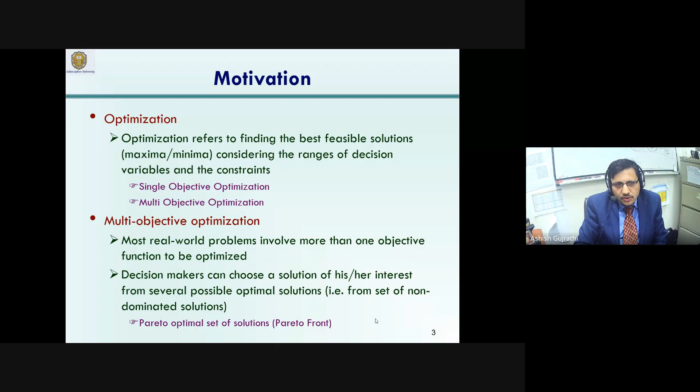So in multi-objective optimization, the decision makers are always interested in getting the Pareto optimal solution, which is also called the set of equally good solutions.

When we compare the stochastic or evolutionary population-based search algorithms, they are far different than the classical or deterministic algorithms. The classical algorithm starts with a single solution and ultimately results in a single solution. They often limit themselves towards reaching the non-optimum solution, because their background remains in starting with a single point, and they follow the fixed transition rule, like the Newton-Raphson method.

In the Newton-Raphson method, we know that the next point is always the current point plus some kind of addition, some formula like xi+1 equals xi minus f(xi) over f'(xi) - the function value at xi over the derivative of that function at the current point. So this differential is going to be added. That means from one point to another, to the next, the transition is going to be fixed.

There is no differentiation. In stochastic algorithms, we go for randomness, and because of the randomness, there is a better chance that the optimum point can be easily approached. So in multi-objective optimization, we often deal with two types of search spaces: the decision search space and the objective space.

So in that case, we are going to get another search space. So dealing with two types of search space is the key for multi-objective optimization, the reason why they are said to be more complex. Whenever we deal with solving such kind of problem, from the search point of view, they are referred to be more complex. And the more the complexity of the search space, the more challenging it is going to get the results. And the more the challenge, the more it is going to be realistic solutions.

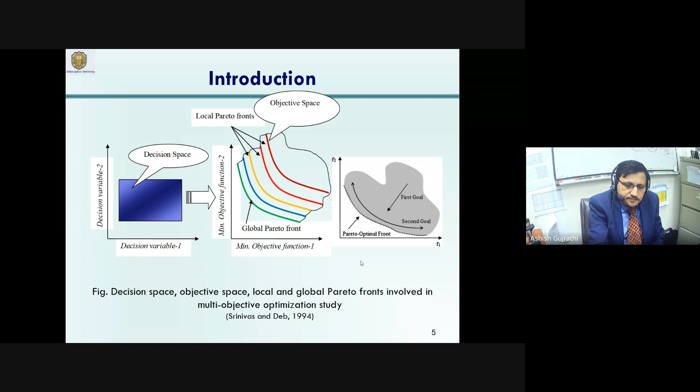So we can divide the multi-objective optimization broadly into mathematics, medicine, science, and engineering. In engineering, we can divide into chemical, oil and gas sector, where we talk about gas operations like gas sweetening, gas dehydration, and oil-based operations like hydrocracking, hydrotreating. Number of operations are there in the refinery. Refinery is full of problems, if you understand. Right from naphtha cracking, hydrocracking, hydrotreating.

The fluid bed catalytic cracking, vis breaking - each of these processes is highly complex, dealing with hundreds of reactions happening simultaneously, and to model such kind of problems, we cannot say that it's going to be a straight aspect. So often it takes efforts, and the challenges are quite wide when you talk about oil and gas based aspects.

The chemical engineering problems like H2SO4, vinyl acetate - there are a number of chemical processes that we deal with. Those are also the processes where multiple objectives like process, energy, safety based aspects can be focused. Pharmaceutical industries, which also comes under the chemical sector, and minerals processing - like iron production from the ores, or aluminum production, or any kind of cobalt, or any kind of metal or non-metal production. That will involve dealing with solids, and to model such kind of process, it will need extra knowledge of dealing with solids.

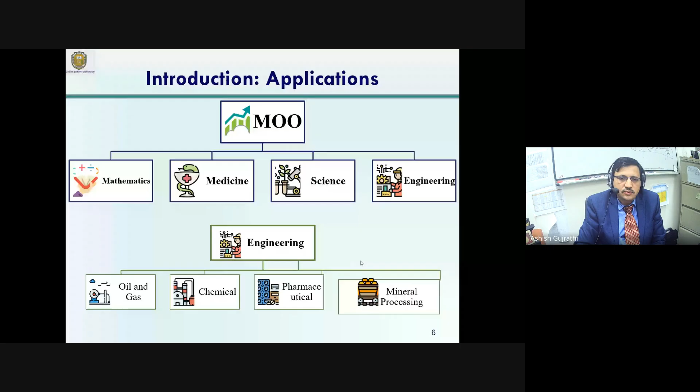Particularly, our group have successfully solved hundreds of problems to me. I can say that these topics, though they look to be bulleted, belong to the PhD titles of some of the students, and often MSc work from the students, or from the industrial projects that we solve. Each of these problems has taken not less than one year to solve and to get published.

So styrene manufacturing process, right from adiabatic and pseudo-isothermal operation, then low density polyethylene reactor, which comes under the polymer sectors, PTA oxidation process - another very complex process, polyethylene terephthalate wiped film reactor, where we deal with multiple phases like polymers, gases, and the polymers are also the dead polymer and the live polymer. Nylon 6 polymer manufacturing process, solar desalination with phase change material.

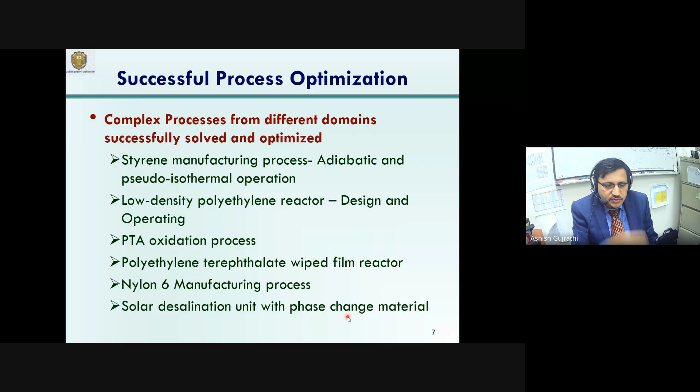So in this case, wax is used as phase change material. Right from solid to liquid phase, its heat transferability will keep on changing, so that aspect has to be considered in the desalination process. Pyrolysis of jatropha residue, de-oiled cake, supply chain planning, waste office papers for cellulose production, extractive desulfurization of liquid fuels, naphtha cracking, ethane cracking, large-scale ammonia production with water electrolysis.

When we say large scale, that means we are talking about industrial scale. The idea of adding the title 'large scale' is to relate the work to industrial processes.

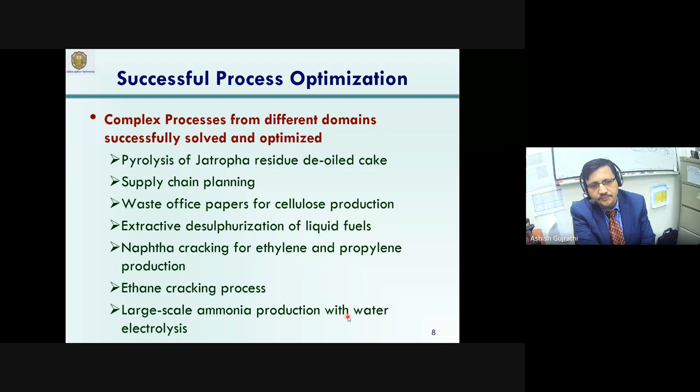Examples include lysine fed batch fermenter in the biochemical sector, cell recycle based continuous lactic acid production, occupational health and safety for process industry, green ammonia production, large scale methanol production, and water flooding in oil fields.

Water flooding in oil fields refers to the oil and water present in the earth, in the porous part of the rocks. Such oil wells are often spread over kilometers, and the depth is also often several kilometers. So we get the geoseismic data, and from there we start our study.

The approach deals with training the model using real-time data from years, which we consider, and then driving the optimization from this subspace. Otherwise, it is extremely difficult to deal with water flooding based problems.

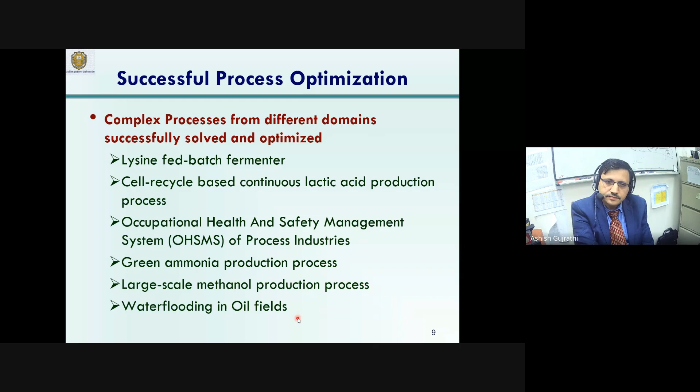Acid gas sweetening is a sector we have been working in a lot for almost a decade. Still the work is going on, and the title is so wide that it will never end. That kind of opportunities we are able to see.

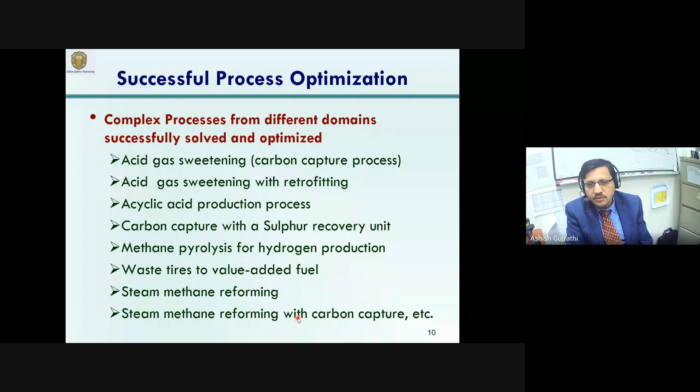Other areas include acid gas sweetening with retrofitting, acrylic acid production, carbon capture with sulfur recovery unit, methane pyrolysis for hydrogen production, waste tires for value-added fuel, steam methane reforming and its optimization, and steam reforming simultaneously with carbon capture, etc.

Out of so many problems that we have attempted and successfully solved, in today's lecture I will talk about the biochemical process, where I will discuss lactic acid production process, oil and gas, where we'll talk about the carbon capture process, and the green ammonia production process from the chemical sector.

So the first title is cell recycle based continuous lactic acid production process.

If I see the mathematical model or the schematic, we can see that there are two reactors here, reactor 1 and reactor 2, and the cells, in this case the viable cells, are recycled. They are separated and recycled back to the reactor. This is how the industry is working in the real world: the cells are separated from the substrates and from the products, and they are recycled back.

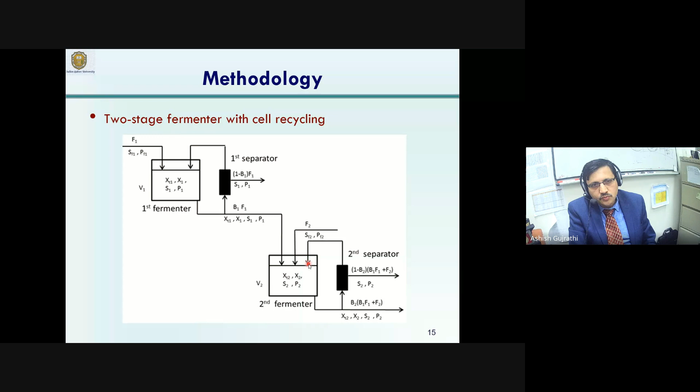The viability of cells has to be checked, whether the cells are dead or not, because we cannot deal with high temperature or high pressure in biochemical processes. These cells are basically live proteins, so dealing with live proteins in chemical processes is not that easy. The way we deal with a catalyst, though dealing with a catalyst is not simple either, dealing with proteins or cells is more difficult than dealing with a catalyst.

A number of equations have been used. These are the four differential equations used to model the two stage biochemical production process: four equations for the first reactor, and similarly another four equations for the second reactor.

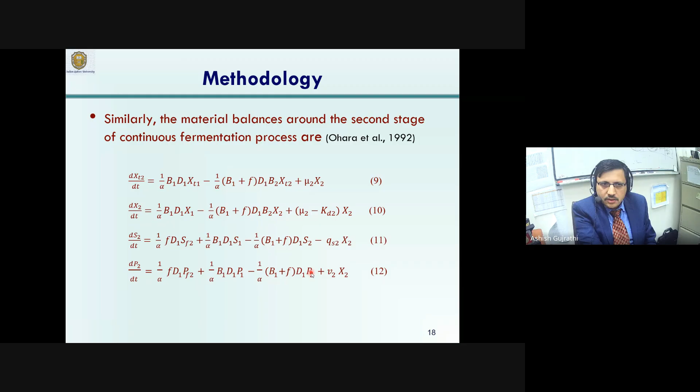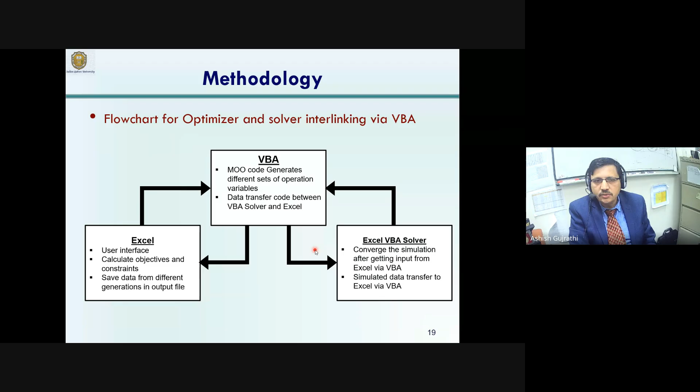A number of variables are listed here, and we made an effort to collect the independent variables. Accordingly, the equations are solved using Visual Basic, using Excel with macros formed by the VBA solver. This has been linked with another Visual Basic code in Excel macros, and Excel was used for data transfer in this process — so Excel linked to the macros of the optimizer and the macros of the solver, interlinked together to get the results we are going to discuss.

In this case, the first job was to tune the model. The very first task goes into tuning the model, done for different types of kinetic parameters.

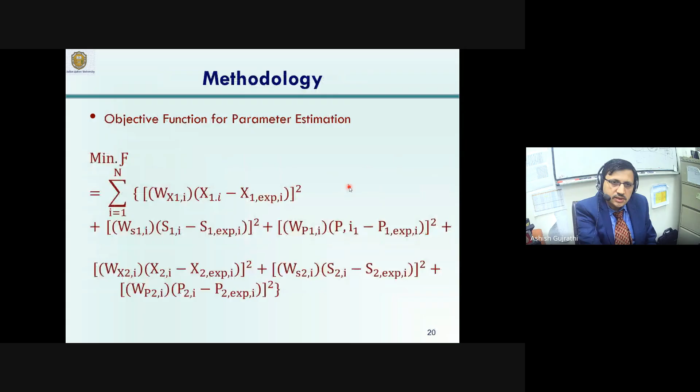Kinetic parameters like the specific kinetic constant for growth, for production, for dissociation — a number of kinetic parameters. These kinetic parameters come through the model itself. If you see the model, they are present in equations like Kp and Kd naught. So all those parameters are constants.

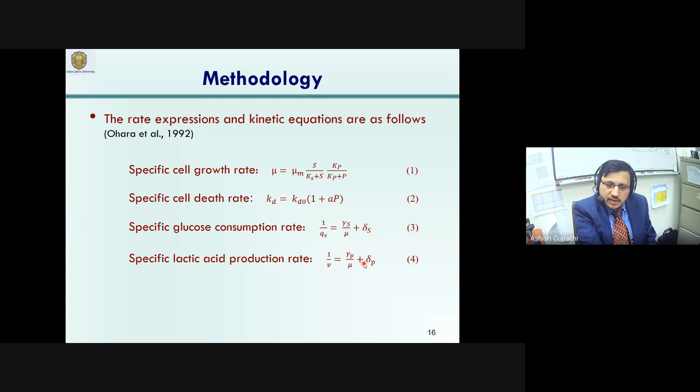In the parameter estimation, we have targeted the variables which are kinetic in nature — that means the ones which are usually obtained using experiments.

If you consider the efforts put in the past with the experimental approach to obtain those kinetic parameters, first of all, it is almost impossible, or very difficult, to obtain the values of 9 or 10 kinetic constants through the experimental approach. Through the experimental approach, we can deal with 1, 2, or maximum 3 kinetic constants in general, but dealing with 9, 10, 12, or more than 7 or 8 variables is almost impossible. It takes huge cost, huge effort, and the uncertainty range varies a lot, given the budget available to researchers.

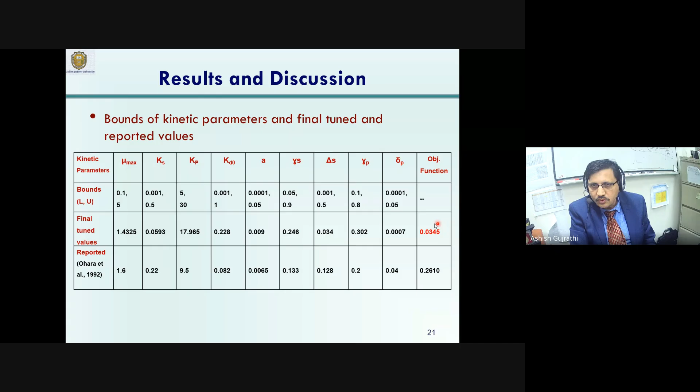So finally, tuned values are there, and we can see that we got the objective function value. We got 0.03 compared to 0.26.

Now, once the model was formulated, we went into optimizing the process from the multi-objective perspective. Towards this, productivity, substrate conversion, and yield - three different objectives - have been optimized simultaneously.

Productivity was formulated from the equations itself, in terms of kg per hour flow rate. Conversion is also formulated from the substrate. The idea here is that, as we can see in the model, a lot of substrate in the experimental process was still present - almost 2.5 kg per meter cube of substrate - and the model was tuned with the experimental data.

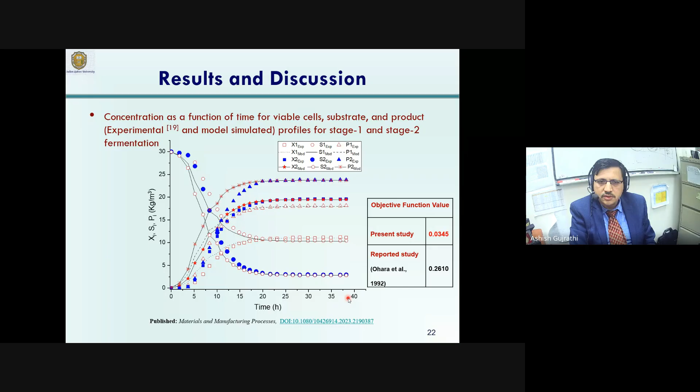So we saw that there exists a good scope in reducing the substrate. There is no fun in keeping the substrate till the end, because if it's present, we also have to deal with separating that substrate from the product. So why don't we look for converting the substrate to zero range? That means zero raw material at the end of the process, but also you end up dealing with the cost of separation that is usually spent in the industry.

Number of variables are used. What are those variables? These are the dilution rates, bleeding ratio, and some of the constants in the equations which have a direct impact on the model. SF1 and SF2 are the substrate feed rates to the reactors.

Productivities of the reactor - because these are not very high pressure, a constraint has been put on productivity and on the conversions, and the range of S2 should not go beyond 0, because ultimately we are dealing with mathematical equations. It is difficult to control mathematical solutions - they may go into negative solutions, which may make our model unstable. So if you add constraints such that if it goes less than 0 we terminate the process, we can multiply the chances of getting results. So constraints are added not just from the process point of view, but also considering the success rate you can get in getting results.

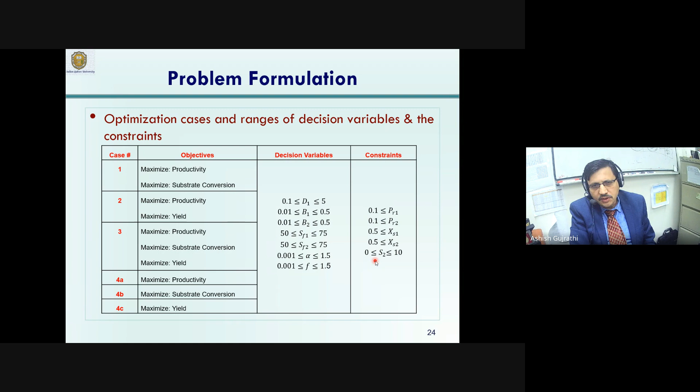Often many researchers deal with solving such kinds of problems and end up getting no results. So if they can focus on why they are not getting results, then issues can be resolved.

This particular process was solved on a very high-speed workstation with 128 GB RAM, and the NSGA2 algorithm was used, which is a very popular algorithm proposed by Professor Deb and his researchers.

For the lactic acid productivity and substrate conversion, a beautiful disconnected Pareto front can be seen. When I say beautiful disconnected Pareto front, I mean it is extremely difficult to reach where our group has reached, and the disconnected Pareto front indicates that the process is highly unstable, highly complex, and highly nonlinear in nature. This non-linearity and complexity leads to getting this.

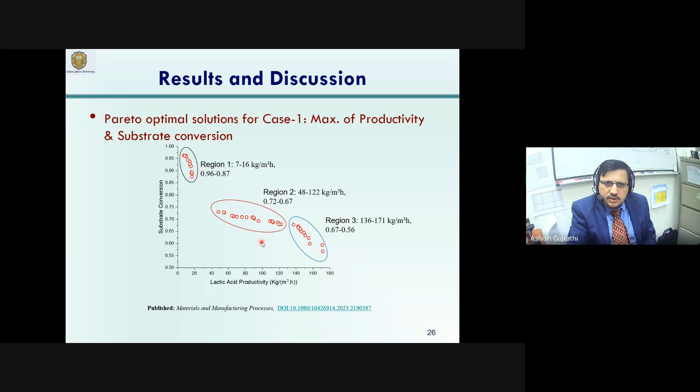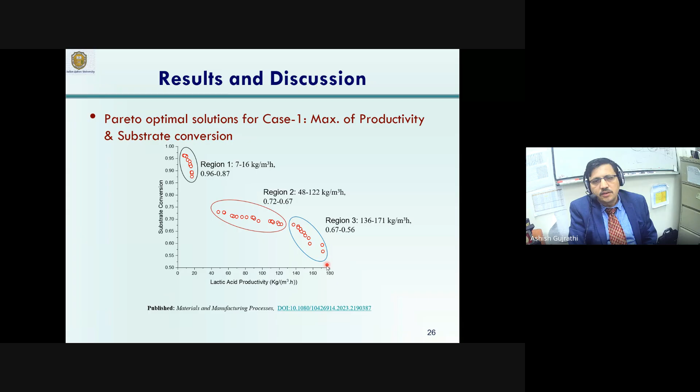Now we need to see why we are getting a disconnected Pareto front, and we discuss that usually in the results. So, from an understanding perspective, we can divide this Pareto front into three regimes: 7 to 16 kg per meter cube productivity, 48 to 122 kg per meter cube, and the third region is from 136 to 170-180 kg per meter cube range.

Now, if you see the variables, what we got on the Pareto front is because of the changes in variables which have affected the search space, the objective space. So, the dilution rate versus lactic acid productivity, and the dilution rate versus the substrate conversion.

If the dilution rate is low, the substrate conversion is high, but the productivity is low. I mean, we are talking about the case where the substrate has got consumed, but no significant product has formed. That means such kinds of solutions are not going to be useful.

In multi-objective optimization, to achieve one objective, the second objective has to be sacrificed. So if you want to achieve 100% substrate conversion, then productivity is sacrificed. This is also the reason why in the experimental domain, the substrate was kept unconverted.

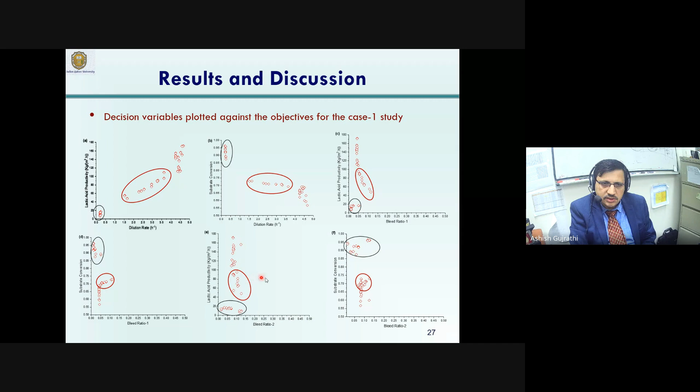Similarly, bleed ratio 1 and bleed ratio 2, with respect to the objectives, have got direct impact on the objectives. Other variables like feed glucose concentration, and the flow ratios F1/F2 and F2/F1, for both objectives also have significant impact on the results, which has been widely discussed in our article.

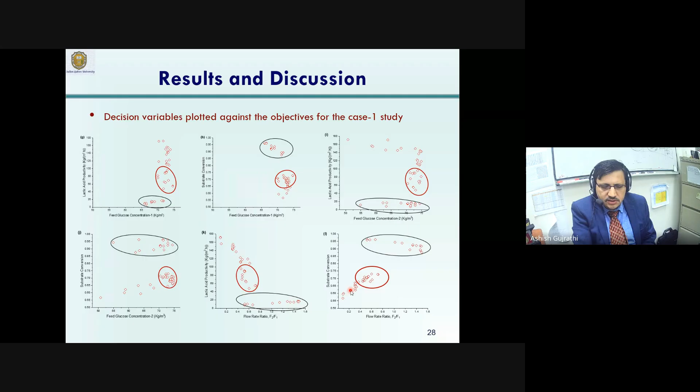The second case is where yield and productivity are simultaneously maximized. Three objectives are simultaneously maximized for the same process, and as we say, the more the number of objectives, the more complex it becomes. We can see the 3D solutions where the best optimal solution is also identified using the Pareto ranking methods.

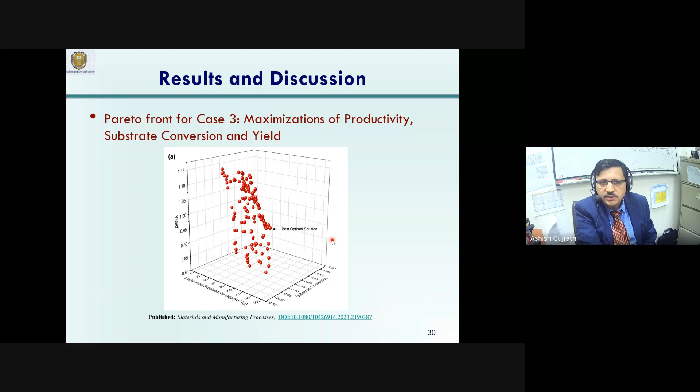Now if you compare case 1, case 2, and case 3 of the results, we can see that when we change the approach from single objective optimization to two objective, to three objective, and beyond, then solving from single objective optimization, we land up with a single solution.

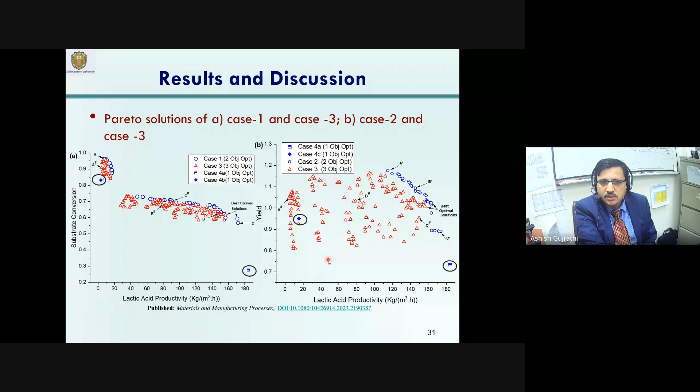The results are compared with the variables to understand why it is happening. We can see that the case with single objective optimization resulted in maximum productivity, and the reason has been explored in the results analysis.

If maximum productivity is obtained in case 4, that is single objective optimization, why has it happened? So if you go into the variables and compare them with the variables obtained where such high productivity was not obtained, like the very low productivity in case 1, we can see why and how things are changing.

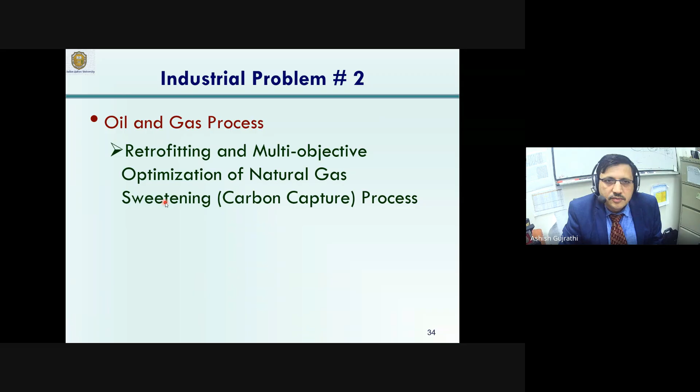Now, a second, more complex and more realistic problem from industry is the carbon capture process. Before we go into carbon capture, we should understand why we capture carbon from the natural gas.

Because the CO2 that is present becomes corrosive, and it comes up with problems of freezing of the gases and erosion of the pipeline. So it becomes very important that we remove elements like H2S and CO2 from the natural gas, and this purification process is called the gas sweetening process.

It's a traditional process - there is nothing new in this process, where amines are used to separate CO2 and H2S from the natural gas, and we deal with huge amounts of flows here.

In terms of standard meter cube, it becomes almost 60,000-70,000 meter cube, which is very high. In kg per hour, it becomes almost more than 1 lakh kilogram per hour of flow rate. So with such a quantum of flow, to remove the CO2 and H2S efficiently, it is very important that the process is run with an optimum approach.

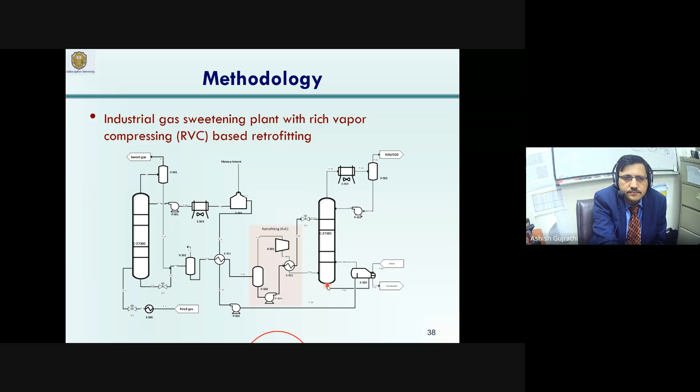So this is the retrofitting unit, and what we did here is we built the model using the Promax software, and it involved interlinking with Excel and with the optimizer, which is written in Visual Basic. So in this case also we made use of Excel's capability to solve such kind of problems, and these problems are that complex that it takes on average 20 to 30 days to get the results that we are going to discuss today.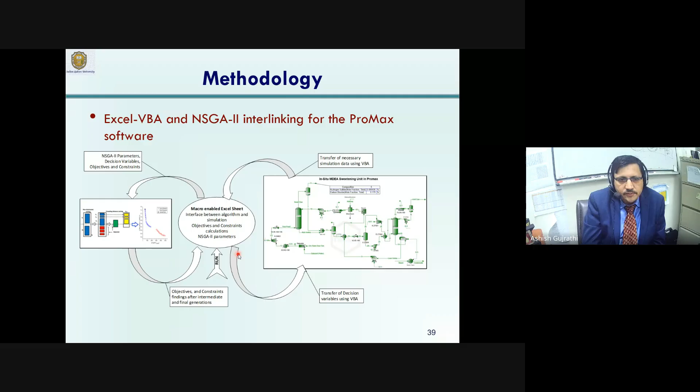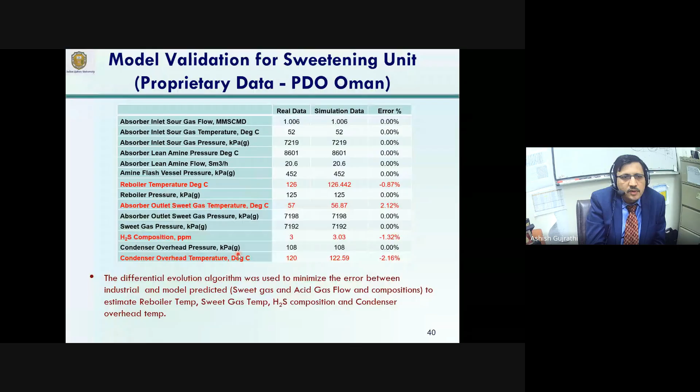The work that I'll be presenting here is already accepted in the Energy Journal. The reviews are completed, and it is accepted in the Energy Journal. The model is validated with acceptable accuracy, as you can see.

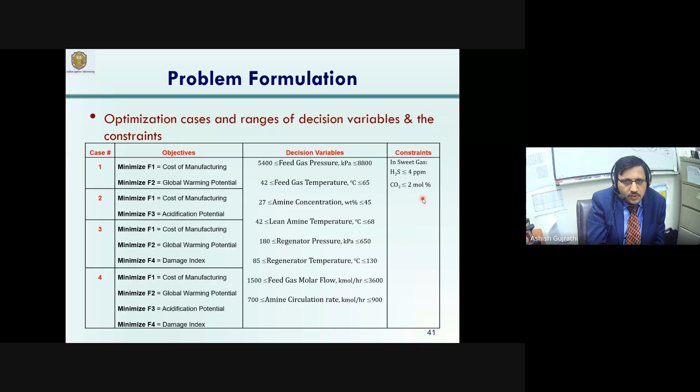But as we know, it is permitted that CO2 can go up to 2%, 2 mole percent in the sweet gas. So there is no point in reducing CO2 to 0 value, and this is where the oil and gas industry, traditionally, they are making this mistake. So this range of solutions, where we say we got equally good solutions, is possible, though the range is not that wide. Allowing the CO2 emission up to 2%, this range of solutions is possible.

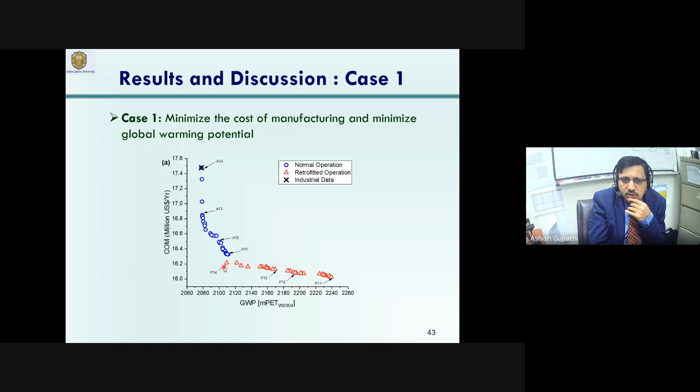And the retrofitted solution, retrofitted design, indeed results in reducing the cost of manufacturing, though it involves fixed capital investment.

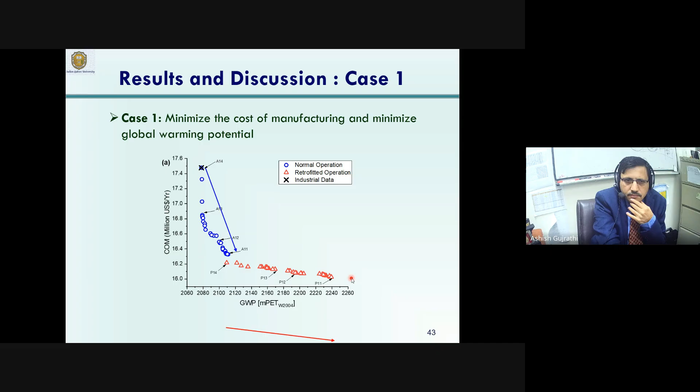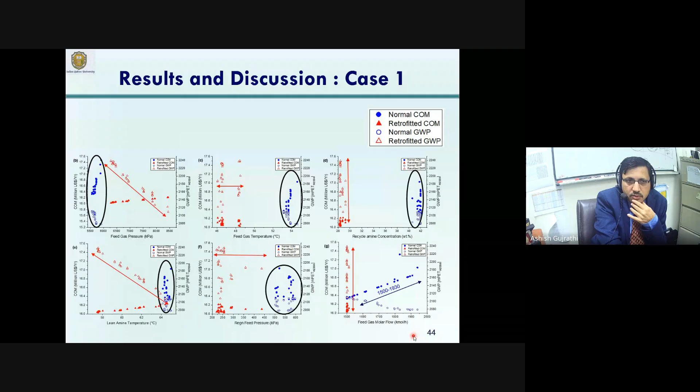So again, it's how things are changing with feed gas pressure, with feed gas temperature, with recycle amine concentration, how the COM and the GWP are getting changed. Similarly, lean amine temperature, regeneration feed pressure, feed molar flow - as you can see, very high molar flow, 1500 kilomole per hour, which is very high - and its impact on optimization is shown through the results here.

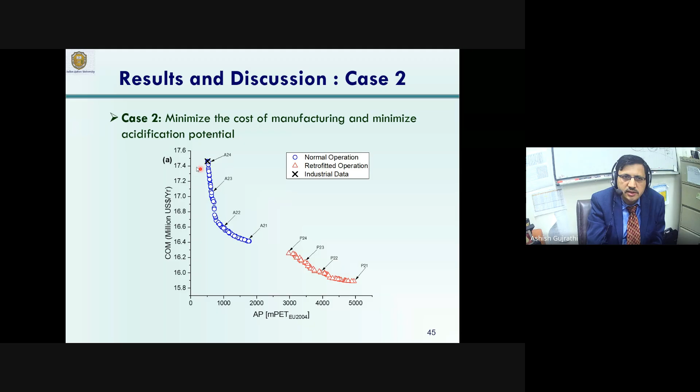The second case, a beautiful Pareto front, where the normal operation and the retrofitted operations are shown. Different points are selected in this case, and they are compared among the normal operation and the retrofitted operation, and also with the industrial data. And it is shown in the tables which we are going to discuss.

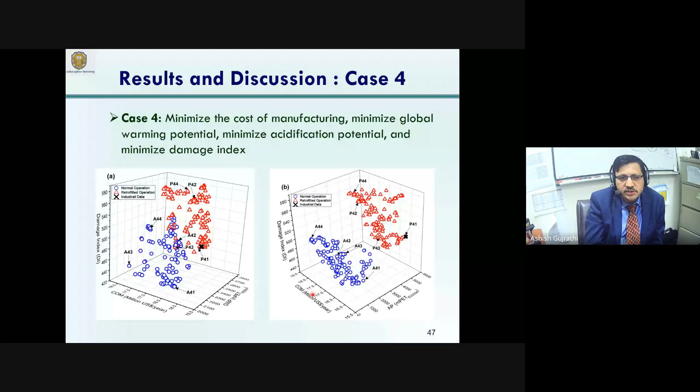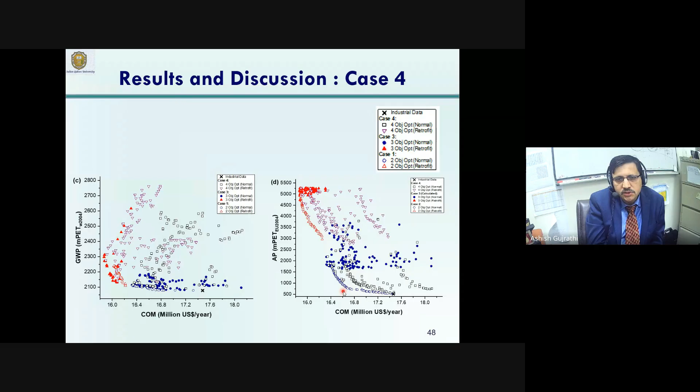The comparison between 2-objective, 3-objective, and 4-objective optimization for a real world problem is shown, and we can see beautiful disconnected Pareto front solutions. Imaginary Pareto fronts can be seen. So this is the local Pareto front, where, as I move my cursor, these are the local solutions. So though in 3-objective and 4-objective they are scattered solutions, they ultimately end up with local Pareto fronts. And because of the presence of more conflicting solutions, their solutions are compromised, or we can say their solutions are non-dominated compared to the 2-objective optimization results.

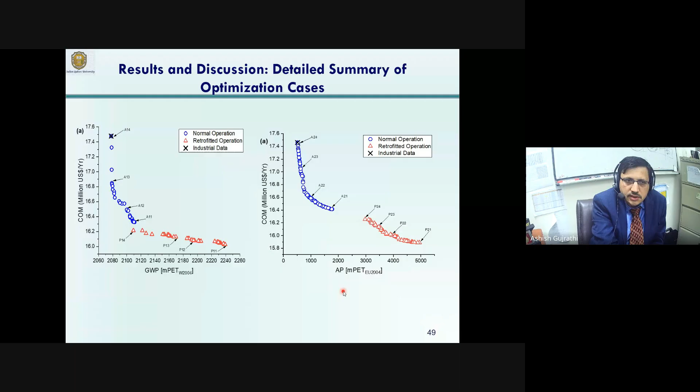For the selected solutions, for the normal operation and for the retrofitted operation - for the normal operation here, and similar results for the retrofitted operations are shown for the selected points. So we can see that an approach is followed here to discuss the results, which makes the publication possible in a high impact journal.

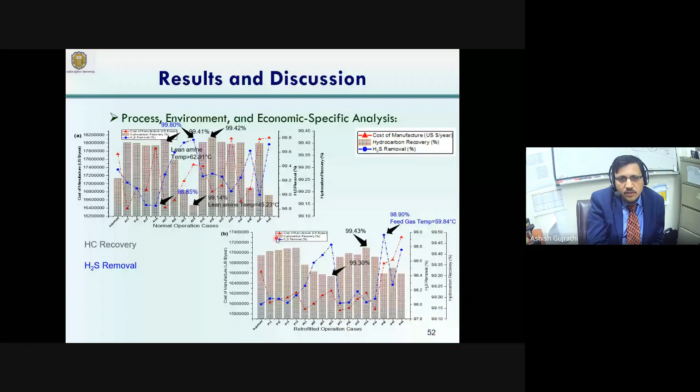And we are dealing with thousands of gallons of oil per hour, so that shows the importance of solving such processes.

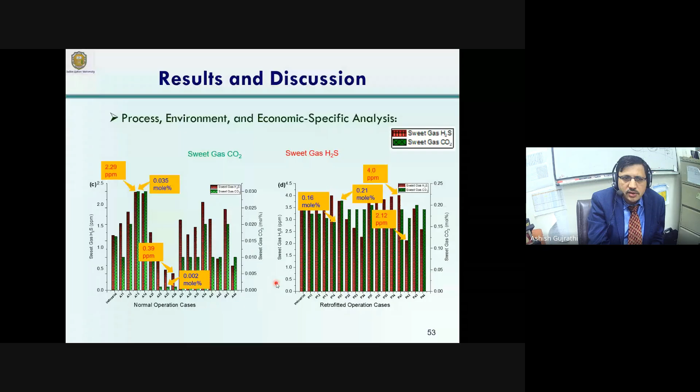Another viewpoint is looking into the sweet gas, H2S, and CO2 for the selected points, and detailed analysis has been reported in our study. I will be sharing our articles with the organizers, and they will be sharing the articles with you.

This is shown for the normal operation and for the retrofitted operation.

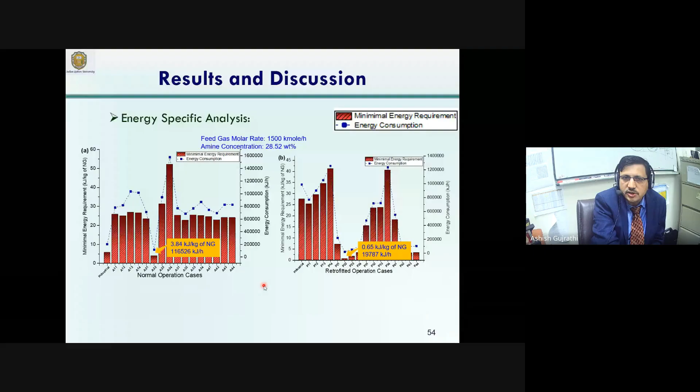The thing we can see here is that there is a distribution. Neither are all of them high, nor are all the selected solutions low, nor are all the solutions unique. There is a difference, and this difference is considered significant when we talk about the process operation, which shows the importance of such a study - getting the distributed solution.

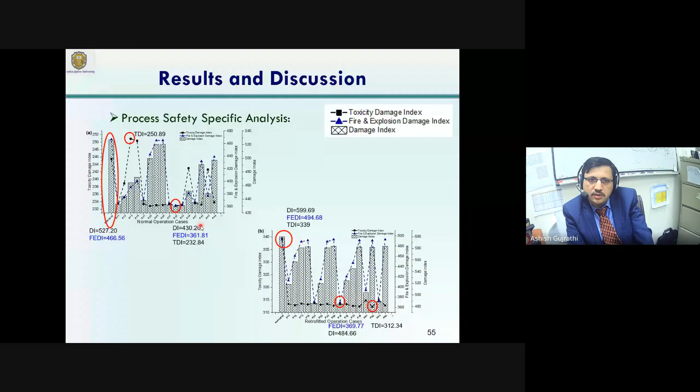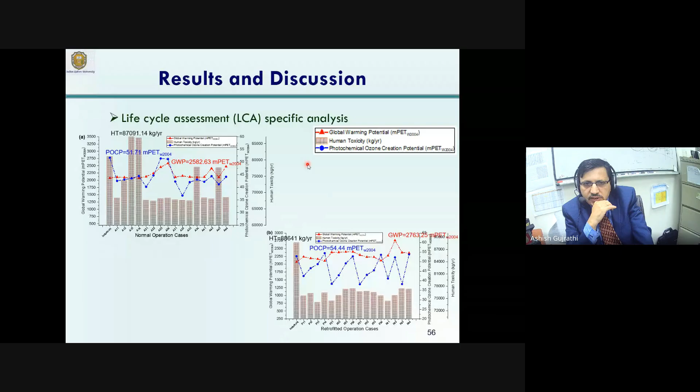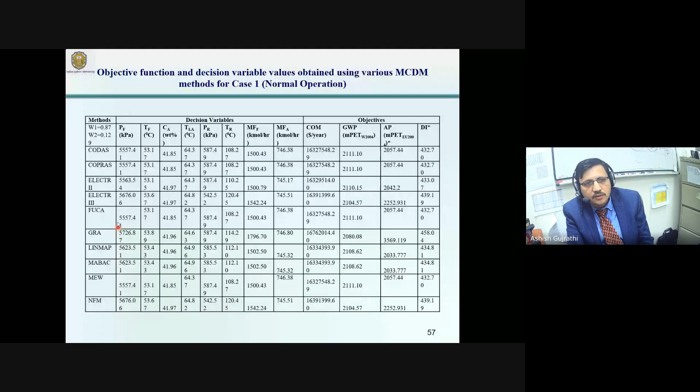So detailed analysis - we made use of 10 different Pareto ranking methods here, like CODAS, COPRAS, ELECTRE II, ELECTRE III, FUCA, GRA, LinMap, MABAC, MEW, and NFM, for the normal operation, and again 10 different methods for the retrofitted operation.

These solutions are ranked for each case, for the normal operation and for the retrofitted operation, and compared using NFM, one of the methods. This method is used to rank and show the top 5%, top 10%, and top 25%.

So what are those objectives? They are related to sustainability. When we talk about minimizing CO2 emissions, minimizing energy, we talk about green processes.

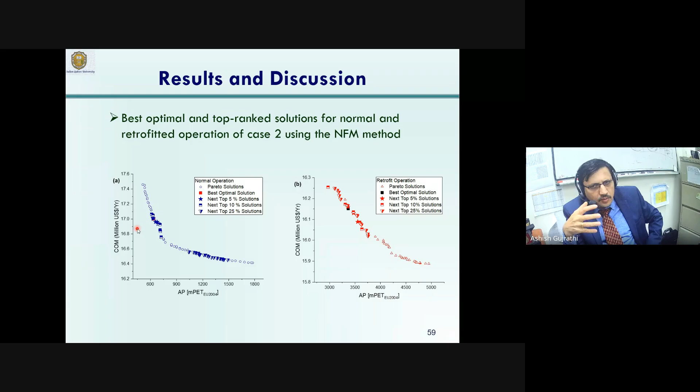When we talk about enhancing the cost, minimizing the cost, enhancing productivity by utilizing resources, that talks about sustainability. And when we talk about dealing with production, emissions, and safety together, we treat it as a sustainable and green approach.

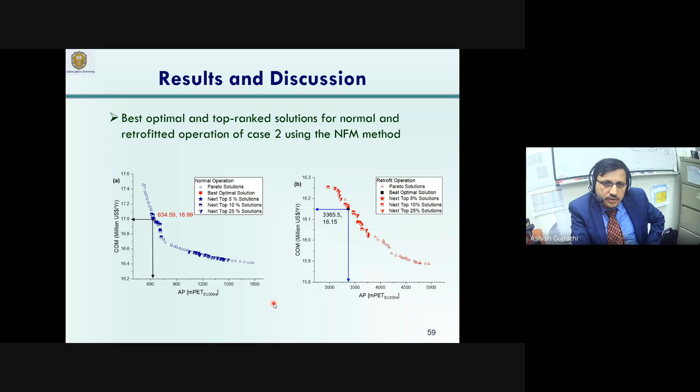Between the normal operation and the retrofitted operation, we can see a significant decrease in the cost of manufacturing: 17 and 16.2 million US dollars per year. There are also significant changes in the AP values, acidification potential values, almost 3365 mPET European Union 2004 versus 634 AP values. So significant changes are present, showing the impact of retrofitted based optimizers.

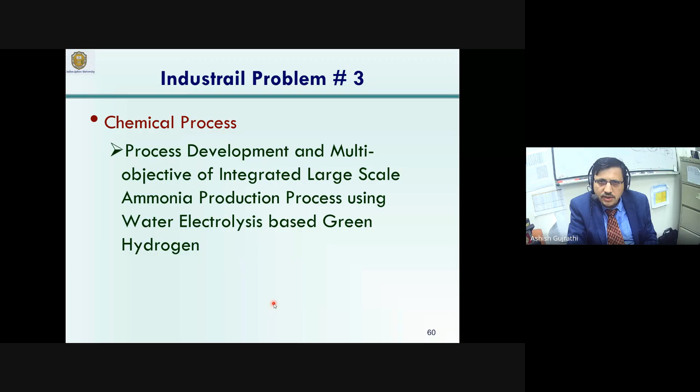The third process, I think I'm in time - we'll finish by 7:15. The third process is on green ammonia, large-scale green ammonia production using water electrolysis-based green hydrogen.

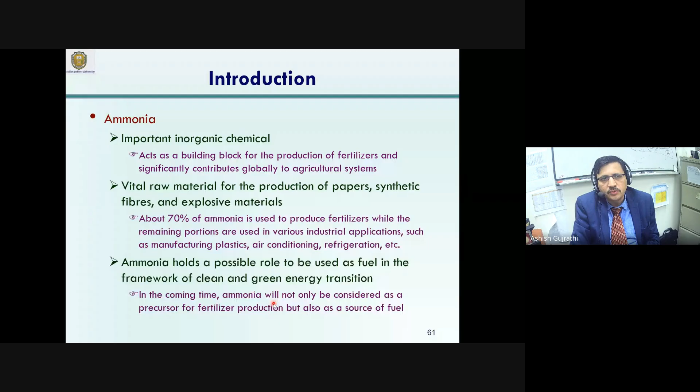Ammonia, as we know, is considered one of the important products, not just as a cryogenic fluid, but also as one of the chemicals where hydrogen can be stored. It is possible that ammonia is considered a product because ammonia has lower specific volume compared to hydrogen, so it is easy to store ammonia and then convert hydrogen from the ammonia.

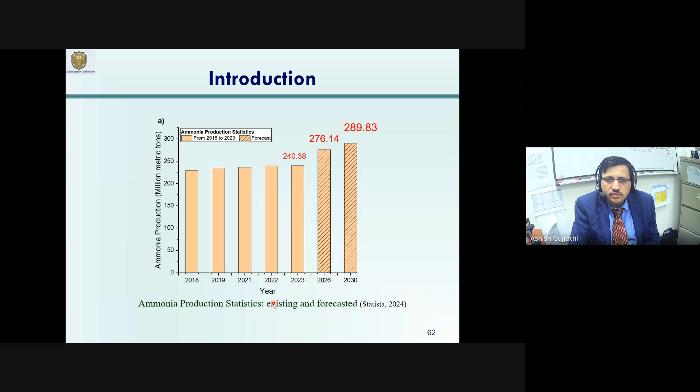The ammonia production rates are shown here, but considering the increase in hydrogen demand, this statistic is going to increase significantly. Among the different regions, the maximum comes from East Asia, which includes China and India, and North America almost 12%, Latin America 4%, and Europe 12%. So the major production is from Asia and America.

Now there will be a growing demand, as we said just now. While meeting the demand, attention should be given to lowering the energy consumption and reducing the emissions. Currently, ammonia production consumes around 2% of total final energy and contributes 1.3% of CO2 emissions from the energy system. It's a huge contribution, we can say.

2% from the final energy, so we can say that it's significant energy involved in the production of ammonia. If we can focus the objective like energy, we are directly contributing towards sustainable and green approaches. The biggest contributor to energy consumption of the ammonia industry is natural gas at 70%, followed by coal, electricity at 3%, and oil at 1%.

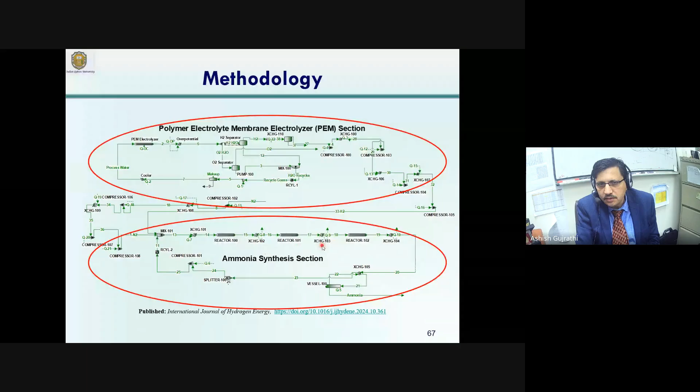Hydrogen, along with air and nitrogen, is used to get NH3 in three connected reactors.

In this case, we maximize the production rate, we minimize the production cost, and we minimize the total energy, subjected to more than 7 or 8 variables. That means we are talking about a multi-dimensional subspace.

Just to show you here, when I say two-objective optimization, I deal with x1 and x2 variables. So one point here will give me one x1 value and one x2 value.

But when I bring another variable here, like temperature as x1 and pressure as x2, temperature and pressure, two objectives, that means a two-dimensional subspace. But when I bring a third variable, temperature, pressure, and concentration...

So one point on the subspace will give me what? One value of temperature, one value of pressure, and one value of concentration.

When I bring a four-dimensional subspace, one point in the subspace will give me one value, then second, then third. Because this is the operating point in a given subspace, one point will have that many axes.

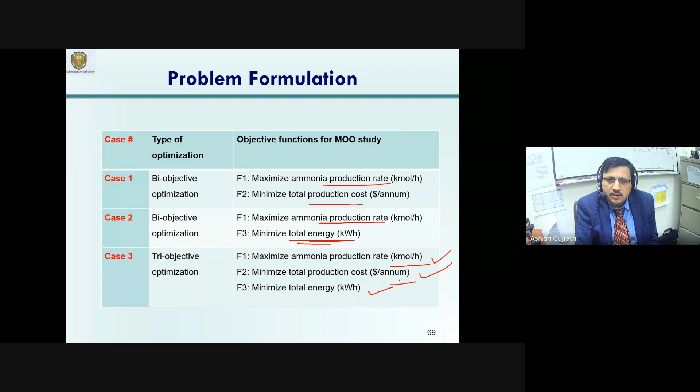This work was published in the International Journal of Hydrogen Energy recently. Green hydrogen and ammonia - green hydrogen because we get the hydrogen using the water electrolysis process. The ammonia is produced and then optimized simultaneously using multiple criteria, including ammonia production rate, total production cost, and energy.

We made use of Pareto ranking, MOO special solutions, global warming potential and CO2 emissions, energy, and heat credits based analysis. So statistical analysis of different factors is conducted.

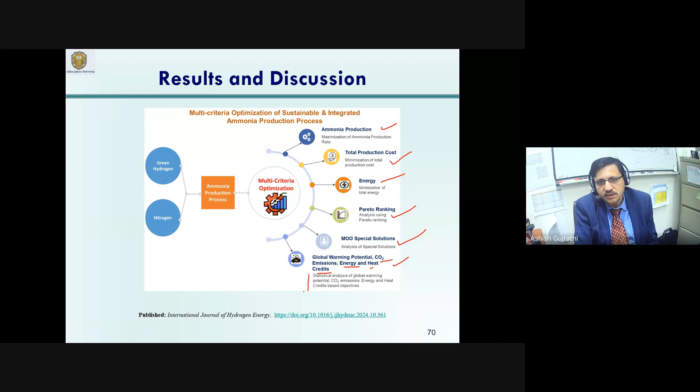Because ammonia, if you look into the Haber-Bosch reaction for ammonia production, it's a reversible exothermic reaction. So lower temperature and higher pressures are favored for such a reversible exothermic reaction, as per Le Chatelier's principle.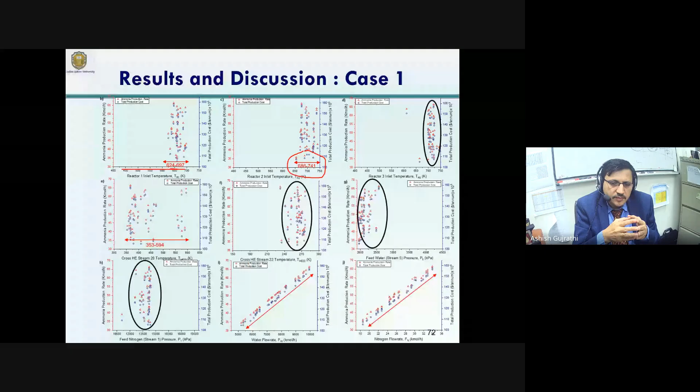All those aspects—the ability of solutions, the nature of the process involving reaction kinetics and their rules—as we know, single reactions are different from multiple reactions. Reversibility is another aspect, isn't it? Endothermic reactions, exothermic reactions, simultaneous reactions happening together, and the thermodynamic aspects.

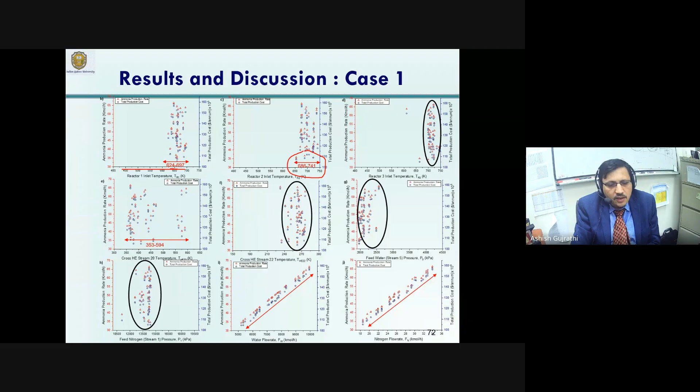So if you consider process optimization as a bundle of all these aspects, it leads to a highly complex domain. By considering objectives like total energy and production, we are taking this title towards sustainable and green chemical technology. In this talk, I have selected a product considered as a storage carrier for hydrogen in the coming time, where sustainable approaches like energy and production rate are simultaneously targeted.

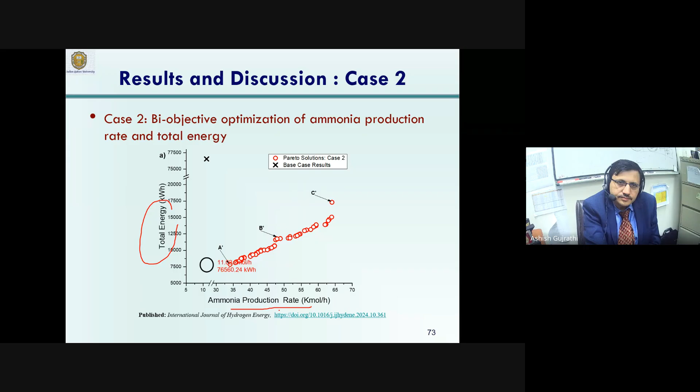The three objectives together towards sustainability.

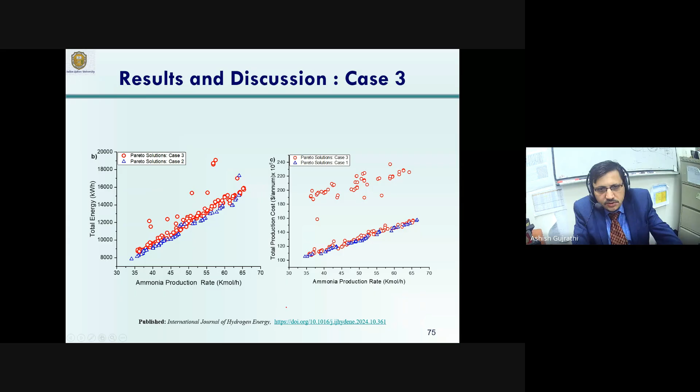I can show you this article. The title itself is 'sustainable'—so if you see the title here, we are able to bring process development and sustainability and green chemistry together, isn't it? So the talk I'm giving is highly specific to green and sustainable technology.

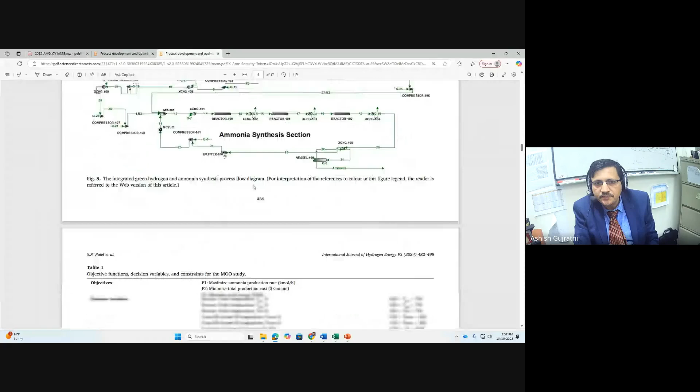What I'm presenting here is all reported in what I'm discussing in these slides—the process model which I have shown in two sections, the chart which I have already discussed with you, and the figures which I'm going to discuss now with you.

The major impact I'm going to show here is on how the solutions are obtained. The time is too small—we cannot go into that depth. But as I told you, I'll be sharing these articles with the organizers, and they can share them with you. They are quite interesting to read.

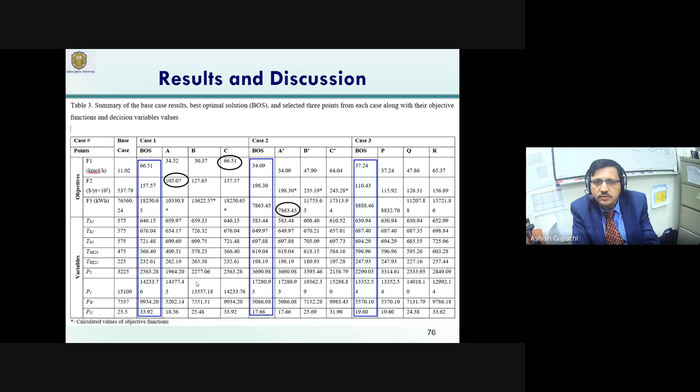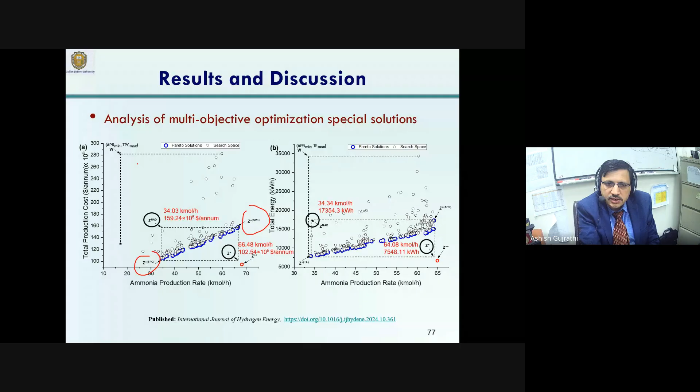For this real world process, we were able to report mathematical aspects like nadir solution, utopian solutions, and ideal solutions, and that has been published in the International Journal of Hydrogen Energy. The Pareto ranking is again applied here.

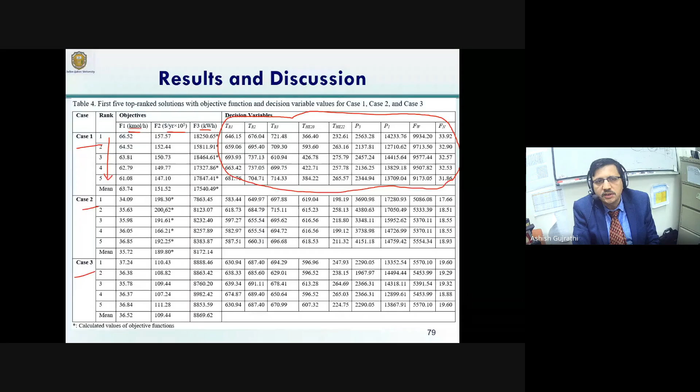The top 5 rank solutions are shown for different cases: case 1, case 2, and case 3—ranking from the Pareto ranks, top 5 rank solutions from the sorting that we got. The detailed impact from the indirectly varied variables on the given objectives of productivity, cost, and energy has been shown here and compared.

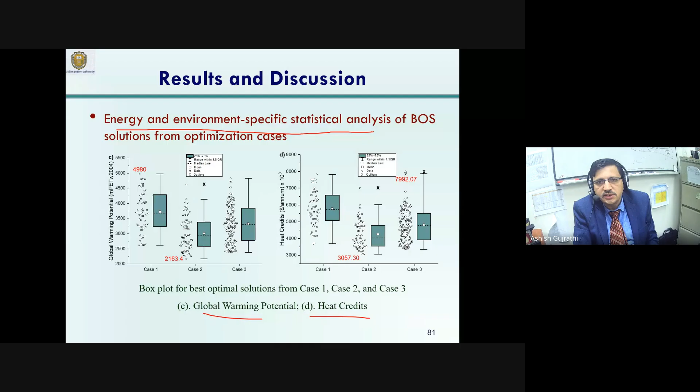This is for another case of energy and environmental specific optimization, where the heat credits and global warming potential are shown here. In the previous case, the energy consumption and CO2 emission were shown. So the energy-specific statistical analysis is shown for the best optimum solutions obtained in different cases: case 1, case 2, and case 3.

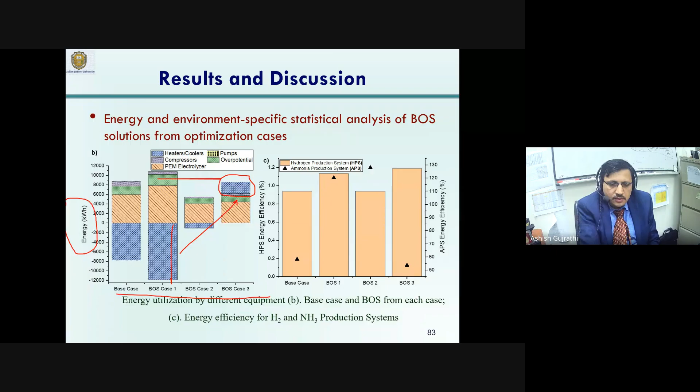In the industry, the engineers' hands are quite tied. They are unable to make decisions, unable to take decisions to a further level. So through this process, an approach has been shown that the negative energy can be converted into the positive. The energy consumed can be converted into the energy emitted. That's the sustainable and green chemical technology applied on ammonia production. I will just conclude my presentation. I think we are on time.

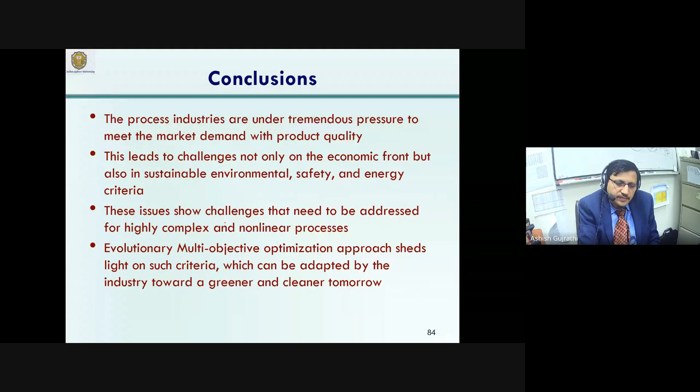The process industries are under tremendous pressure to meet market demand with product quality. This leads to challenges not only on the economic front, but also in sustainable environment, safety, and energy criteria. These issues show challenges that need to be addressed for highly complex and non-linear chemical processes. Evolutionary multi-objective optimization approaches shed light on such criteria, which can be adapted successfully by the industry towards a greener and cleaner tomorrow, for sustainable green chemical technology. Thank you.